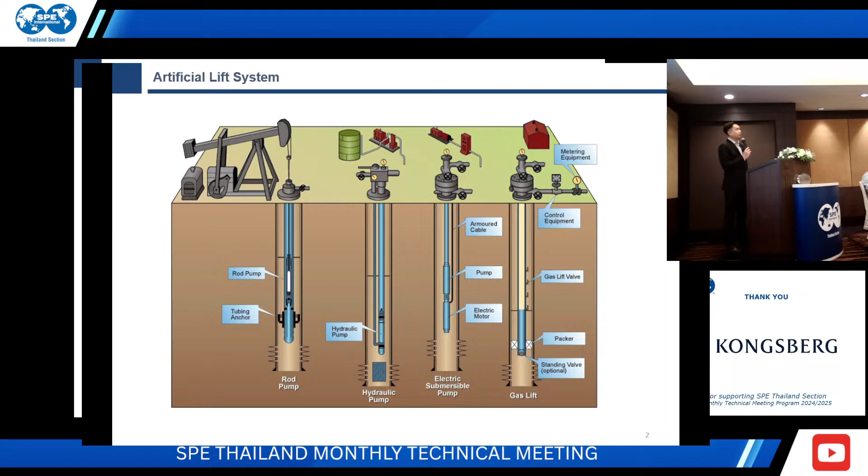Imagine if you are using gas lift, you have to convert into ESP in the future - that can be costly. So at Valeura, we selected ESP as the artificial lift because at the initial phase of field development, we don't have sufficient gas to do a gas lift. We cannot fit other types of artificial lift system. So currently, at our field, across all our operating fields, we operate about 150 plus population of ESP wells.

So let's give an introduction of what is the ESP. ESP can be separated into two parts.

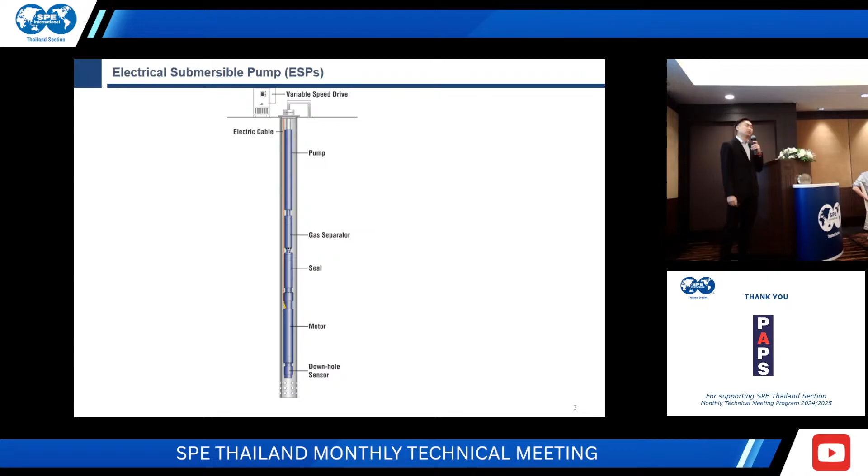Okay, on the top side you can see the VSD, or variable speed drive. At the downhole part, there can be the pump, gas separator, seal, motor, downhole sensor, and ESP cable. Let's go one by one.

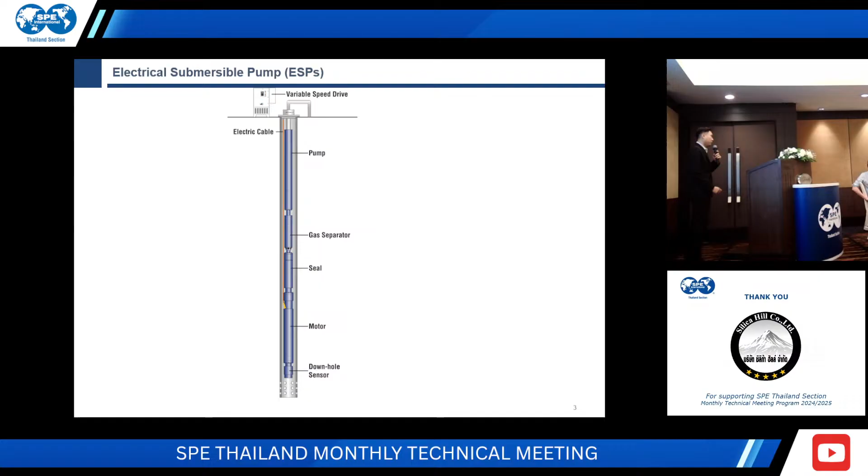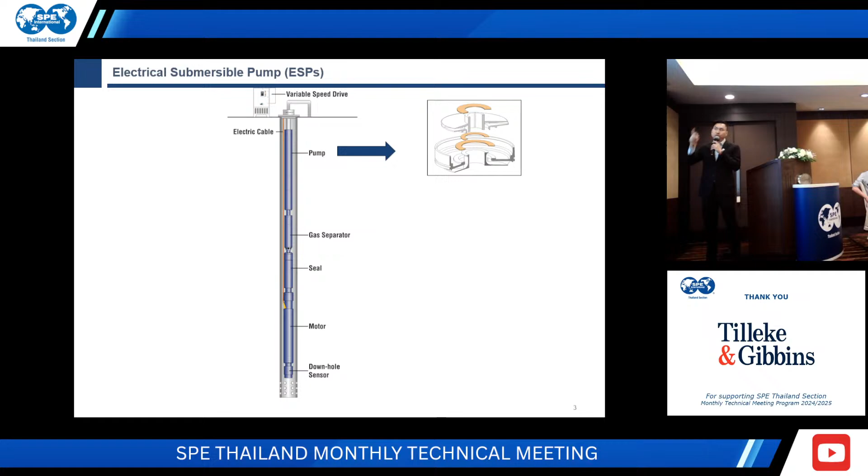First of all, the pump. The most important part of the pump is the pump stage, which comprises two parts: the diffuser, which is the stationary part, and the impeller, which is the moving part, moving fluid from downhole to the surface. You can see the yellow half circle there - they call it the thrust washer. That is to protect against wear inside the pump stage.

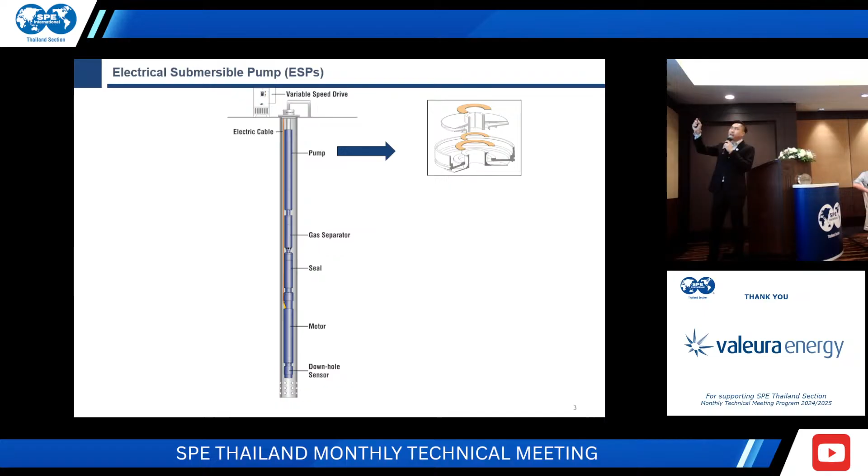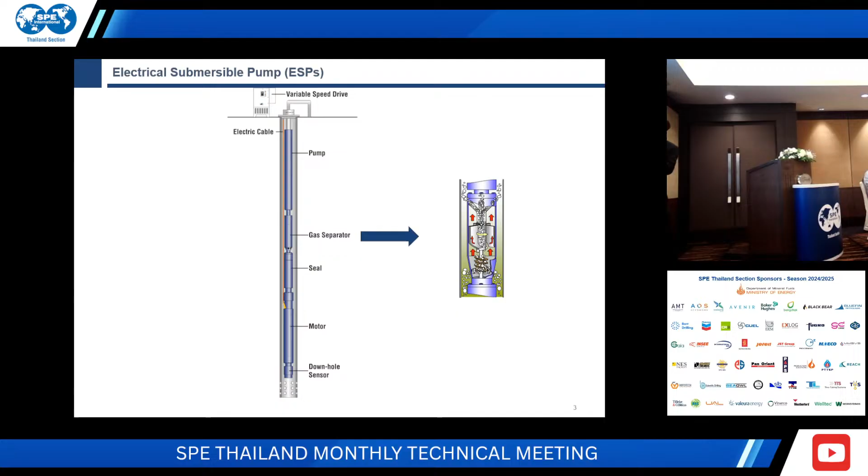Next, if the well has gas, the gas separator can be equipment that helps improve the performance of the pump by separating the gas. You can see the small inducer here - from the big bubble, they induce the small gas, and then this part will use gravity to separate the gas out to the annulus. So if your well has a gas issue, I would recommend using the gas separator.

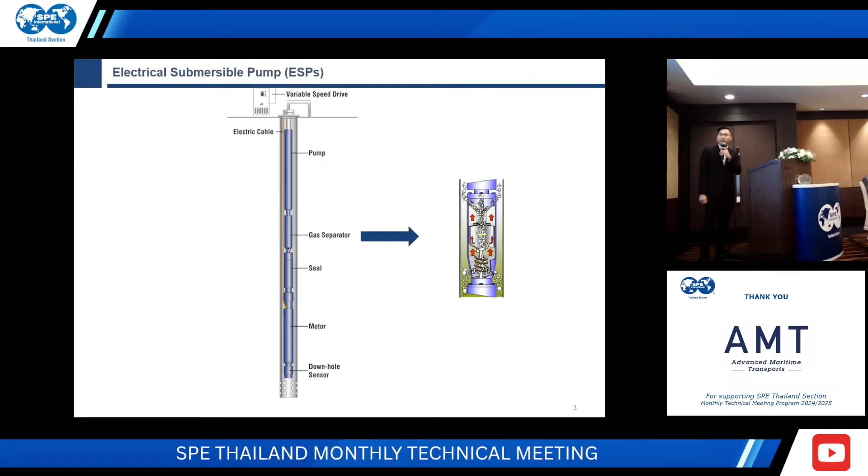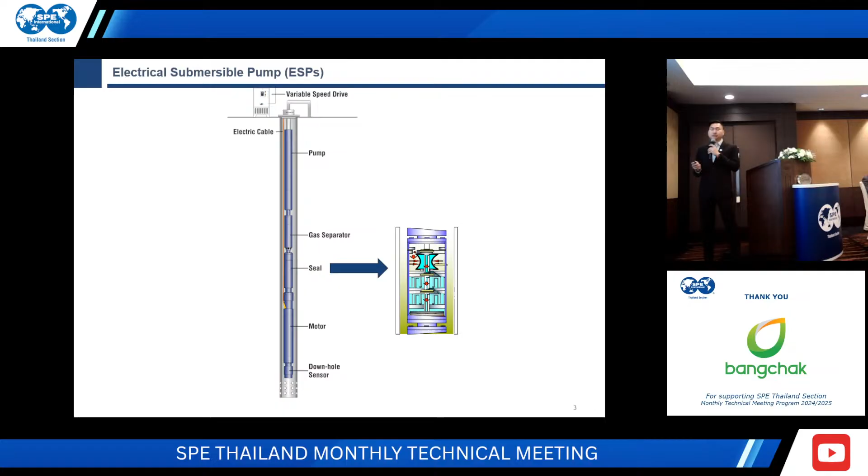So next one is the seal. What is the function of the seal? The seal is used to protect the motor, which is the electrical part. The rest of the equipment I talked about just now is the mechanical part. So the function of the seal is not only to protect the motor, it's also to balance the wellbore fluid and the internal fluid, like motor oil.

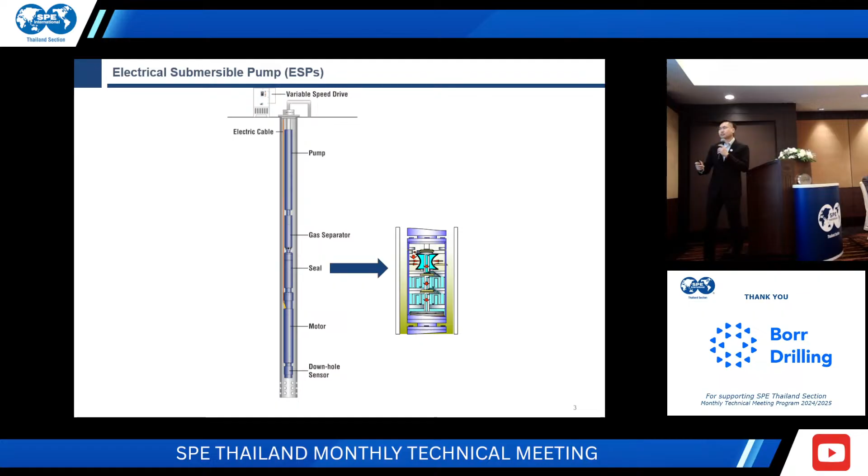Next is the motor. The motor is an electrical part, energized by the power cable from the top. So the motor is driving the shaft from the whole system in order to give power to the ESP.

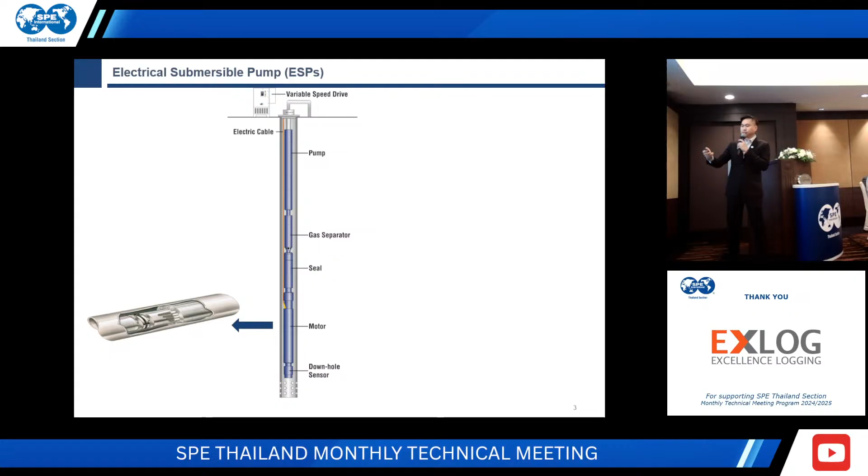And next is the downhole sensor. The function of the downhole sensor is to monitor reservoir parameters such as pressure, temperature, or even give the vibration of the system.

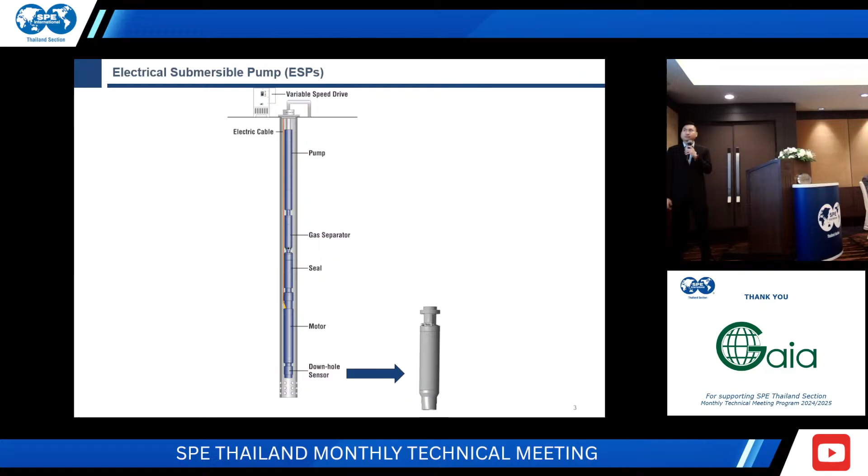So another important part is the cable. Cable can vary into any shape - round, flat - and then depending on the power rating that we need to use, it can be 3K, 4K, and rated based on the temperature of the well. So these are all the main components that we normally use in the ESP, and each of them has an important part to improve or extend the run life of the well.

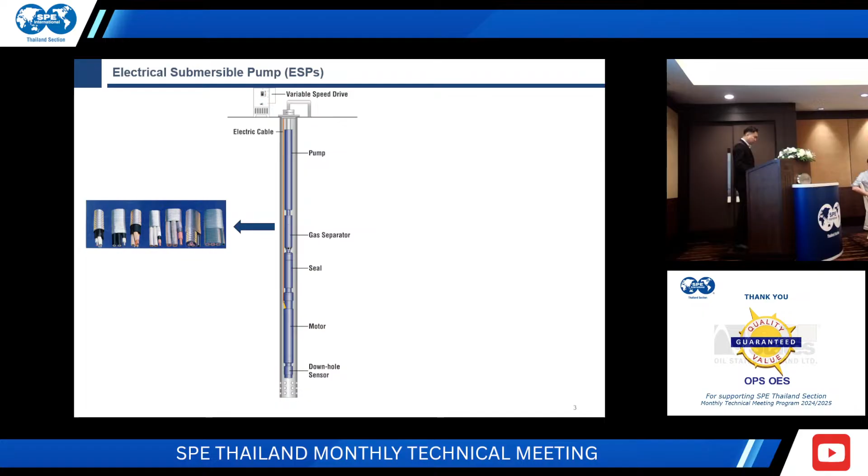Okay, again, why is the ESP important? It's important because in our operating field at Valeura, we use 100% ESP in our production wells. So if one well fails, the cost of the workover can be from maybe $1 to $10 million, depending on the environment - offshore, onshore, the cost can vary. So if the well goes down, of course we need to do a workover.

During the wait for the workover unit to come for the pump change-out, it may be 60 days, 90 days, or even longer. During that idle period, you're going to have deferred production. If you're counting maybe 100 barrels a day of oil, multiplied by the oil price now, maybe $60, and an idle period of maybe 100 days, you can calculate what you are losing during these idle times.

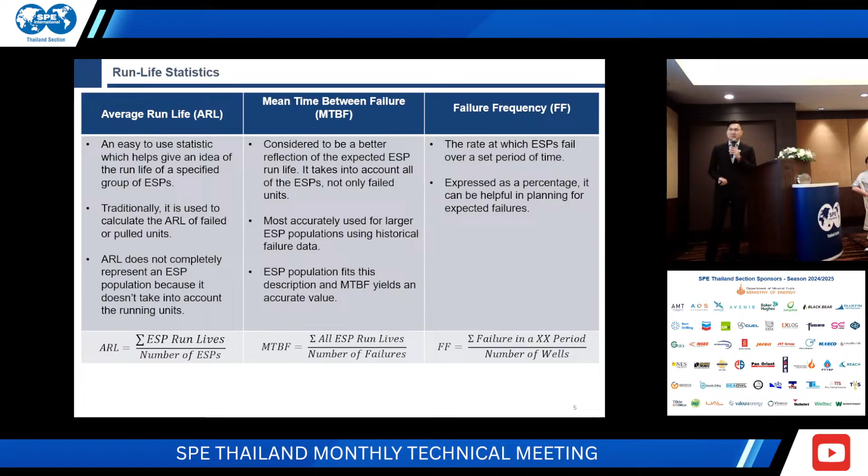Let's talk about some statistics. We can use three main statistics to measure run life. The first one, the most easy form, is the average run life - just the summation of the ESP life divided by the number of ESPs. But this one isn't really complete in representing the performance of the life, because it doesn't take into account the running equipment in the field.

So the other form that we normally use is what we call mean time between failure. This one represents better in terms of statistics because it counts the failing and the running equipment at the same time.

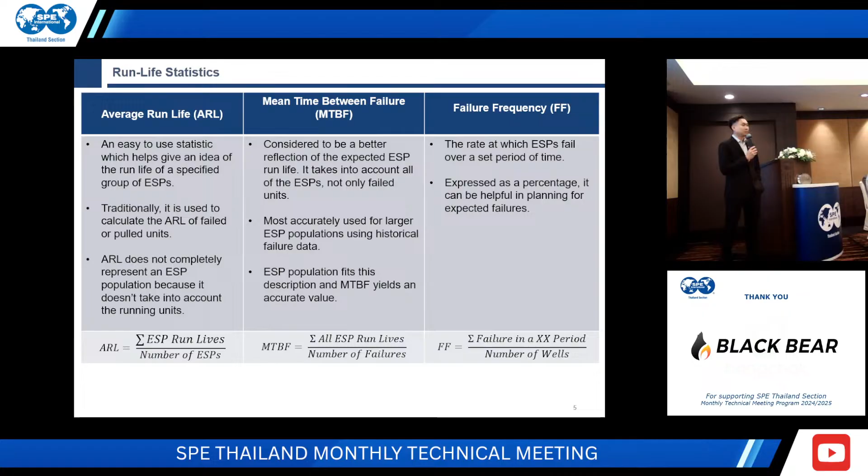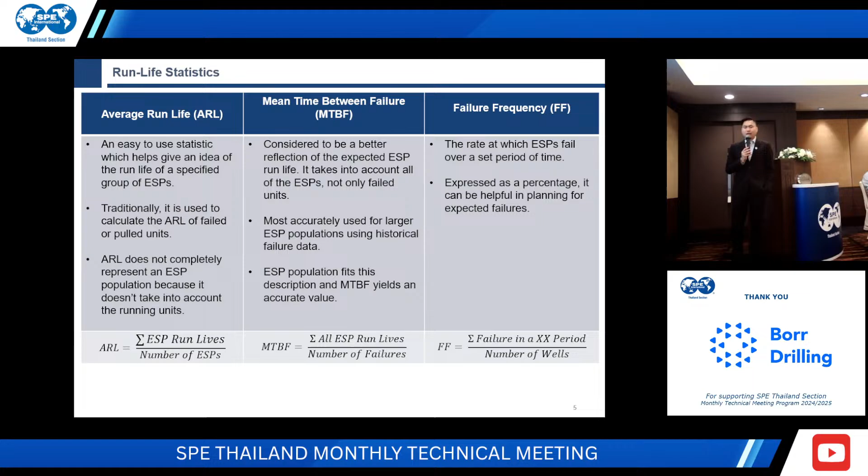And the last one, if you have frequency of failure - this tells you how often your equipment has failed. This is another form that is normally used to measure the life or performance of the ESP.

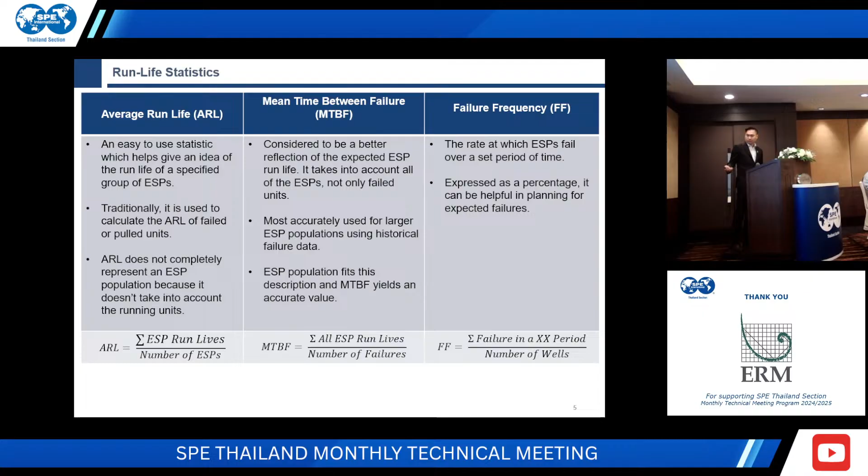So anyone can guess what is the good average life of the ESP? Anyone? 2 years? 4 years?

Actually, there is no right or wrong number if we're talking about the average life. Whatever number you said, if the well economics works for that specific life, it can be a good life. But next question, what is the industrial standard for the ESP life? Normally, based on a lot of SPE papers, they refer to about 1,095 days, or about 3 years. So this is a rule of thumb that we normally use in the ESP industry.

So these are some factors that have an influence on the life. It can be well temperature, viscosity, well conditions, or equipment design. That can affect the life. Imagine if you put the wrong pump, such as a low volume pump, without the gas handling device, in a high gas production well - that can affect the life of the equipment. This is part of it.

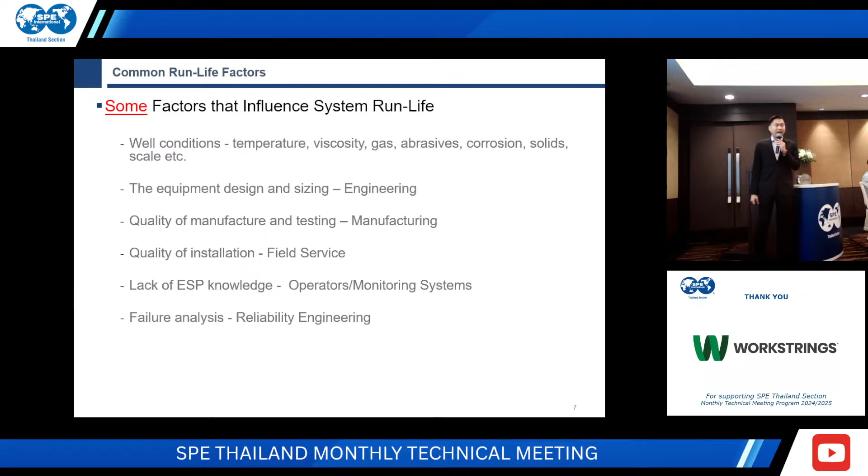And of course, the quality of the field service - that is another factor to me. I used to work as a field service engineer before, so a good quality of field service standards impacts a lot in terms of the ESP run life.

And next, talking about the knowledge - back in our day, when we had a poor run life, we found that our people also lacked knowledge about it. What is the ESP? How does it operate, and how can we make it better in order to achieve a good life.

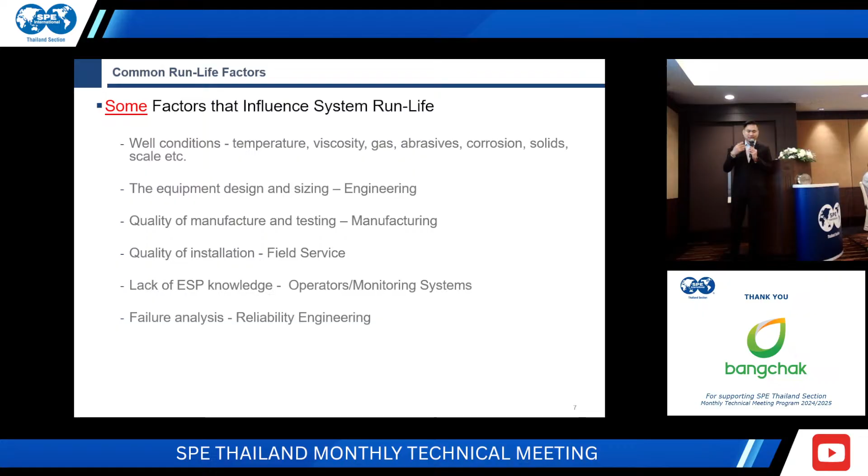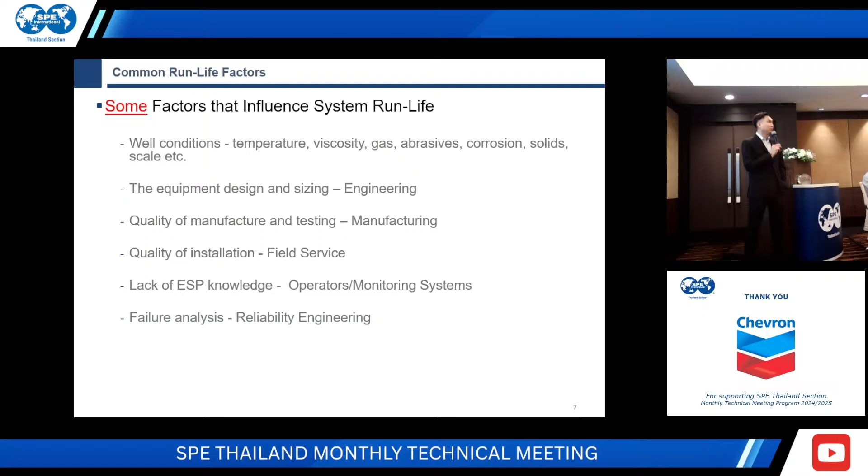And the last one is about the failure analysis. What I should say here is that if you have a failure, and you haven't investigated what is the root cause of the failure, you can have repetitive failure again. So before you select new equipment to work over your well, you should find the root cause first before you do a workover.

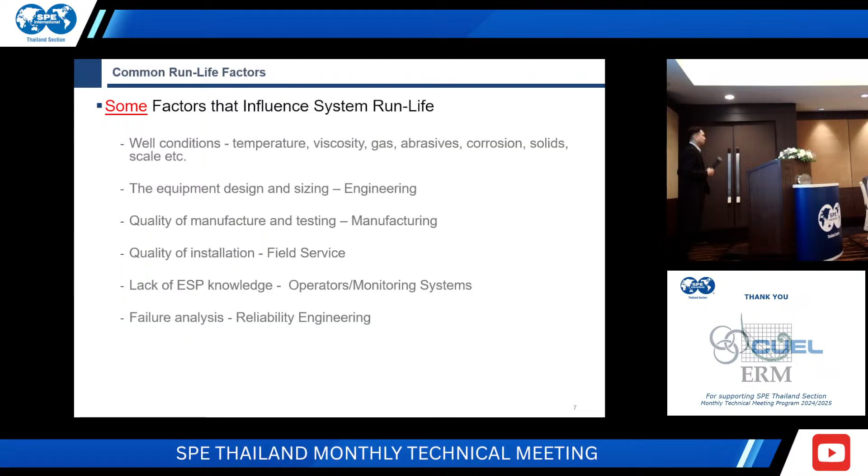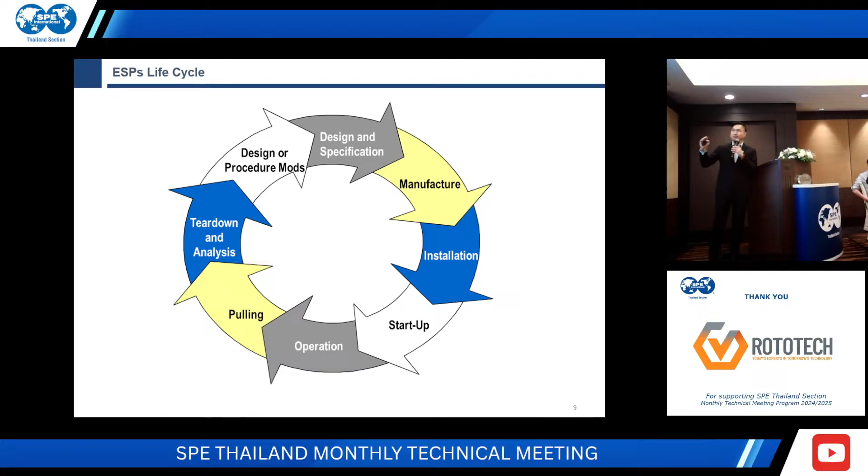So let's start with what we have done. We use this - we call it the life cycle of the ESP. First of all, we start with the design and specification. Back to what I just described, about selecting the wrong pump with the wrong well.

So what we have done here is we start grouping the flow rate. You can see that we have grouped high flow, medium flow, and low flow rate here. And not only the flow rate, we look at the total dynamic head of the pump in order to size the pump stage properly. So we group this, and then standardize the equipment across the field, because in the past we used to have like 5 wells with 5 pump models, or 10 wells with 11 models. So we are grouping into 3 models.

Okay, so next, for the well that we have a gas interference issue, we also integrated the gas handling device into the design to prevent the gas lock.

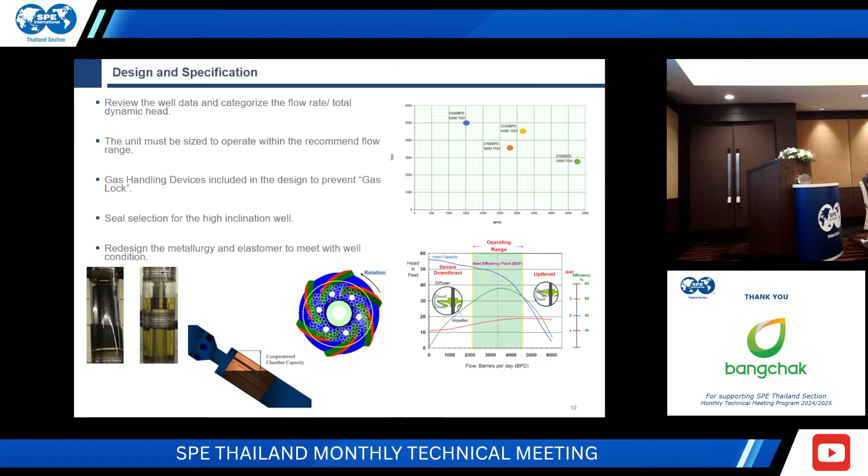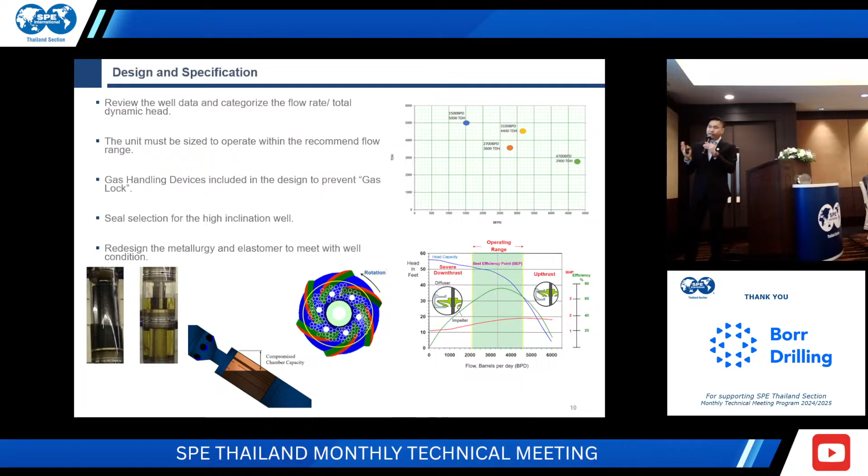To explain the gas lock, look at this picture. Normally, because of fluid gravity, the lighter fluid tends to be accumulated at the center or the eye of the pump stage, and the heavier fluid, which is maybe water or oil, will be accumulated outside. So this equipment has a hole at the middle that helps flow the gas at the center. But of course, this will trade off with the lower head of the pump.

Another thing I forgot, this one. So not only for the correct sizing, we also, at the sizing, look at the operating range. We design the operating points of the pump into this area, which we call the best efficiency point, or the ROR, the recommended operating range. So we don't size the pump into this up thrust or down thrust.

Unfortunately, like today, I cannot talk about the design too much, because that is not the objective of my presentation today.

Next, what we have done. If you look at the picture on the left, that is we call the bag system for the seal. On the right, we call the labyrinth system. So in the high inclination well, imagine maybe 80 degrees, 90 degrees, and if you use the labyrinth, you can see that it can compromise the chamber capacity. So instead of using the labyrinth, we change the design to use the bag system for our high inclination wells.

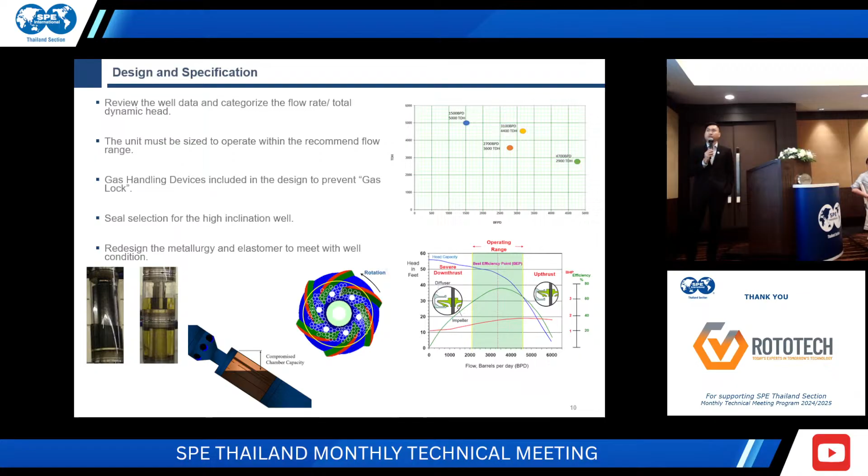And the last one is about designing the metallurgy for the maybe corrosive or sandy system, like we use and call AR, abrasive resistant, integrated into the pump. Look at the well temperature again, and select the elastomer that's proper for the well temperature.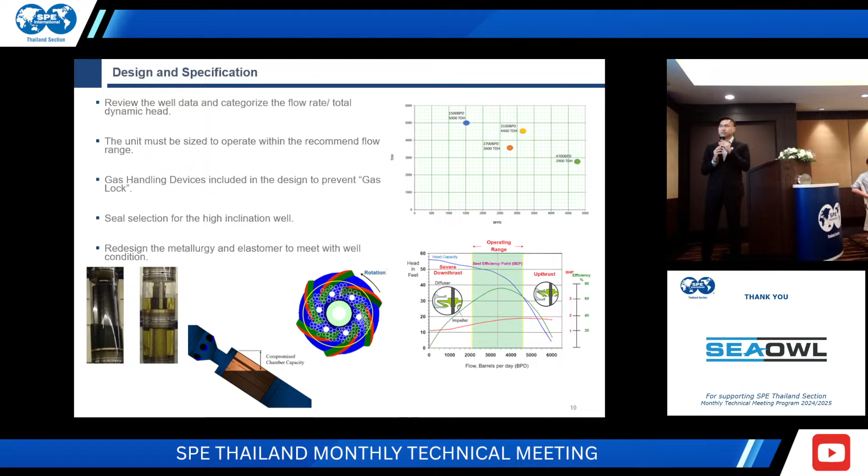That is about the design.

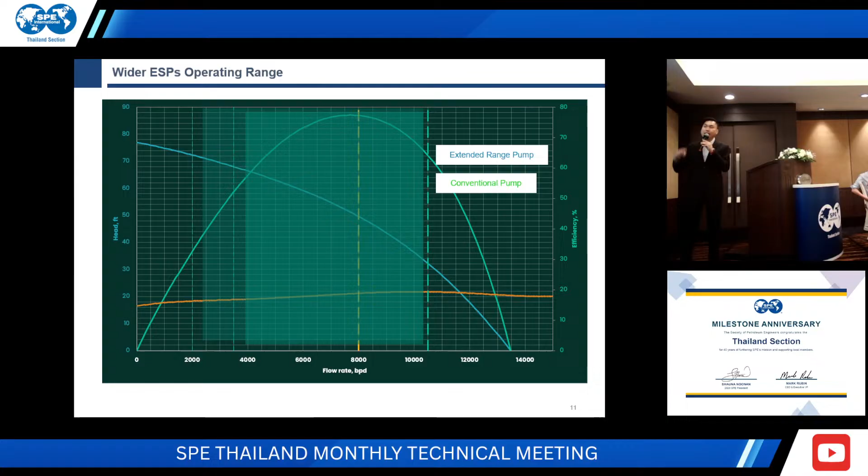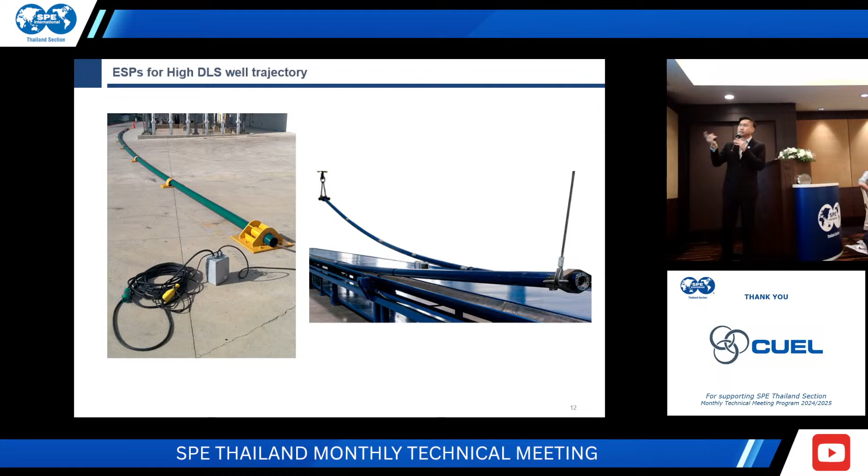We use this one in wells that have DLS more than 6 degrees, up to 15 degrees, in order to unlock some of the wells that have very short life because of equipment breakdown at the connection. So what is the technology? The technology removes what we call the bolt connection between each component - between pump, motor, seal, which used to be the bolt connection. So this one is a thread connection, in order to provide more flexibility of the equipment when passing through those high dog legs.

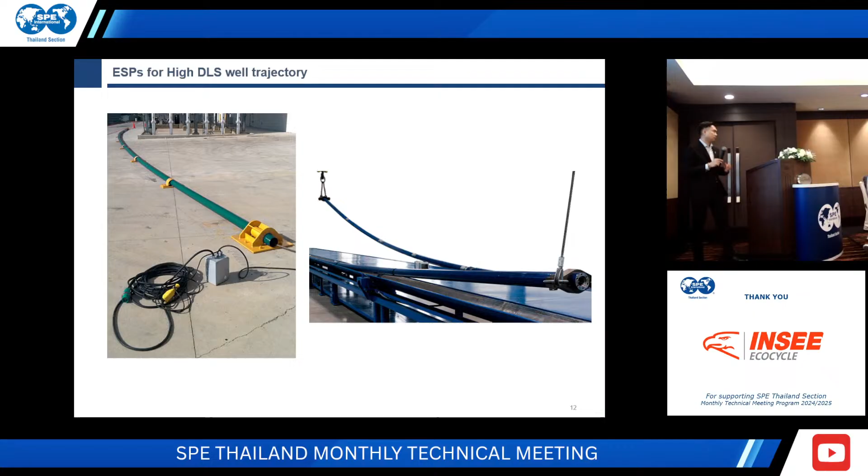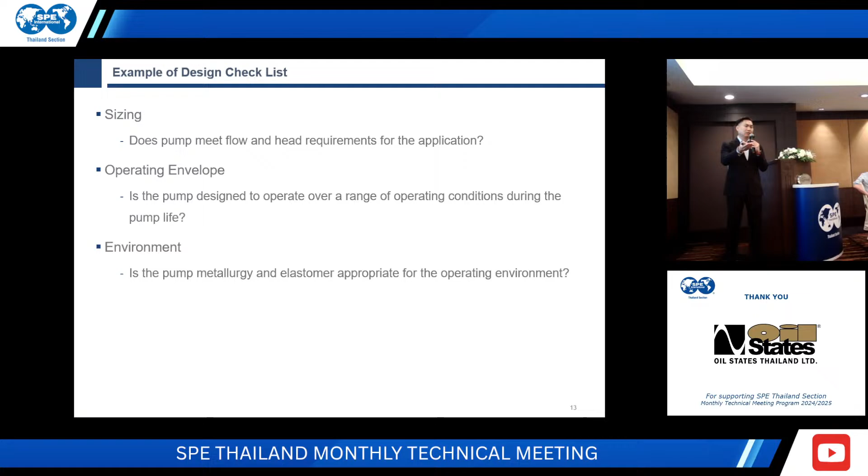Okay, so but before we start to install the equipment, or place an order, we need to check all of this. For example, like sizing - you need to question yourself, does this pump meet the flow and the head requirement of this well? Or on the operating range, is the pump operating in the operating range, or whatever condition they're facing in the future, like maybe the flow may not be as high as your expectation, or the flow may be lower than what your expectation. So that extended range can help in this case.

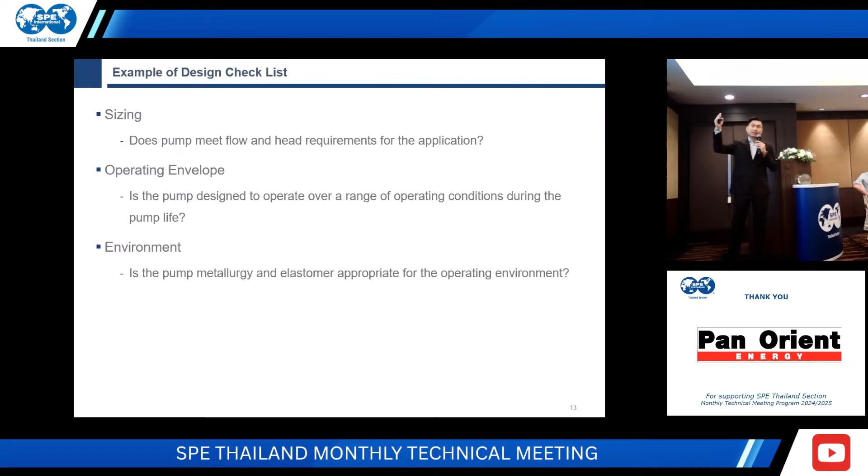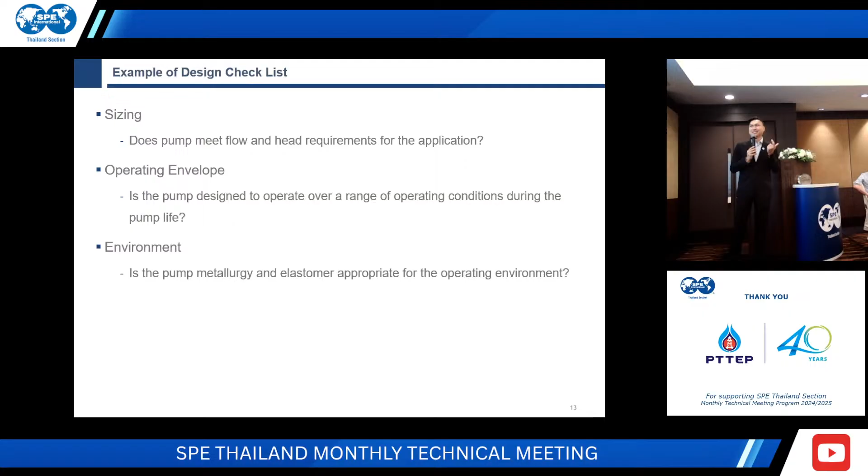And again, for the environment, these are the 3 keywords: sizing, envelope, and the environment. These are the 3 keywords we check when we check the design.

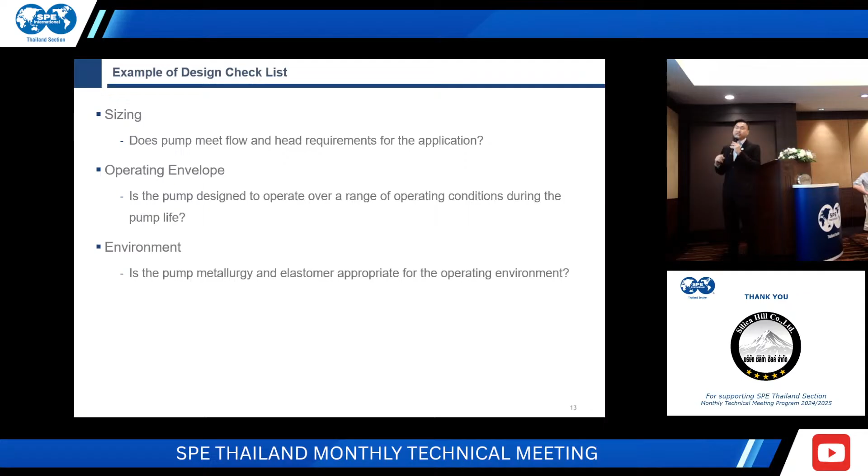But this is just an example - the same thing will be applied to the pump, motor, seals again. Because, for example, like the seal - if you have a high angle well, you shouldn't use the labyrinth seal, you should use the bag system.

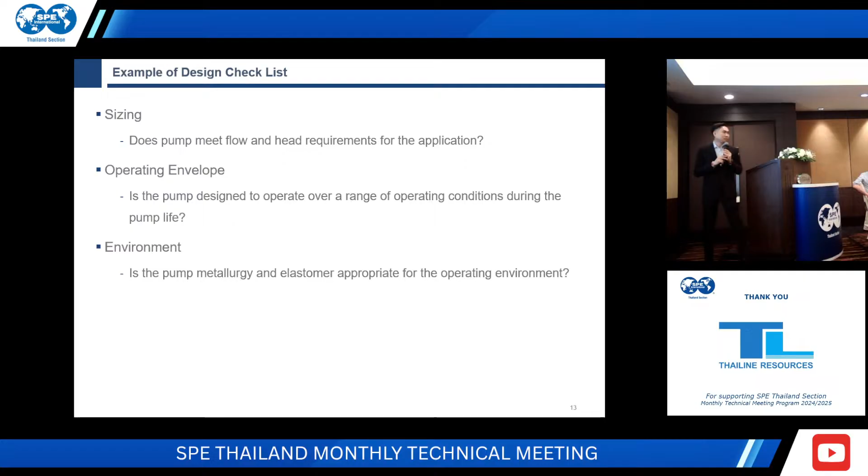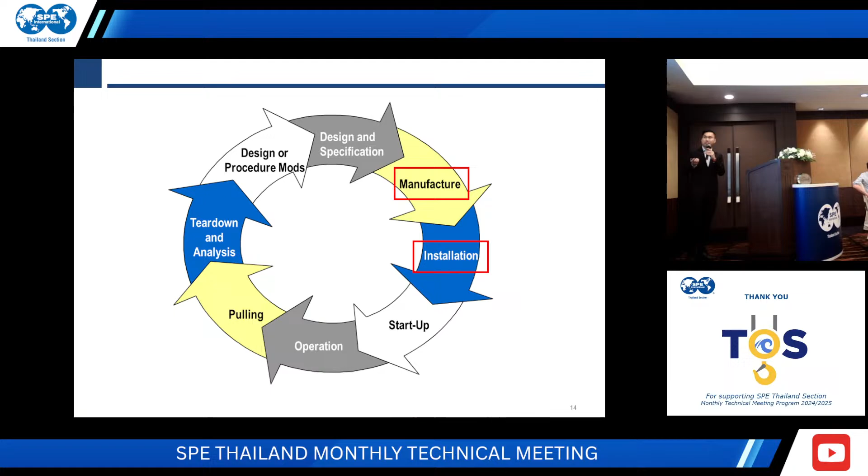So I already finished the design and the specifications. Next is the manufacturing and installation.

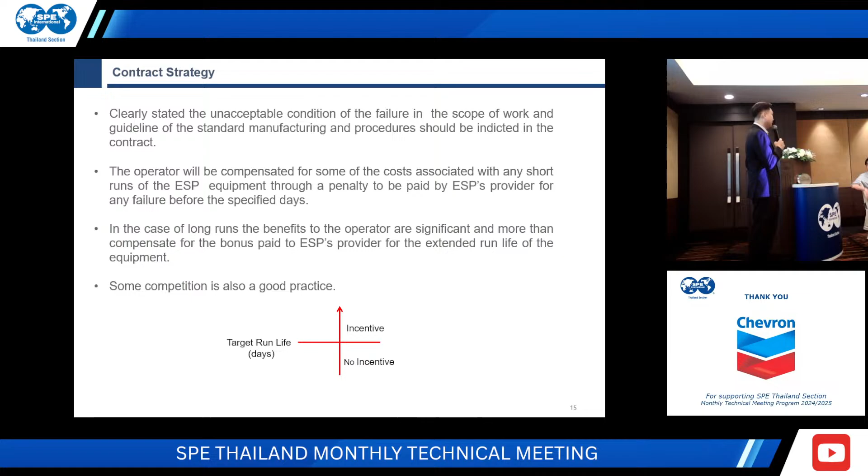In manufacturing, you need to put the scope of work clearly - what kind of API standard, what kind of equipment fits your well. You provide the well data. If you're not sure about the well data, you can give a range for pressure, temperature, in order to size it properly. And of course, the ESP is so important to your fields.

So why don't you set the target as the goal for your business partner? You can see on the bottom we put the target life here, and whenever they pass this target life, you can give them some incentive as an attractive bonus for performing the job properly - equipment, design, preparation, installation, even monitoring. They should be part of this work with you.

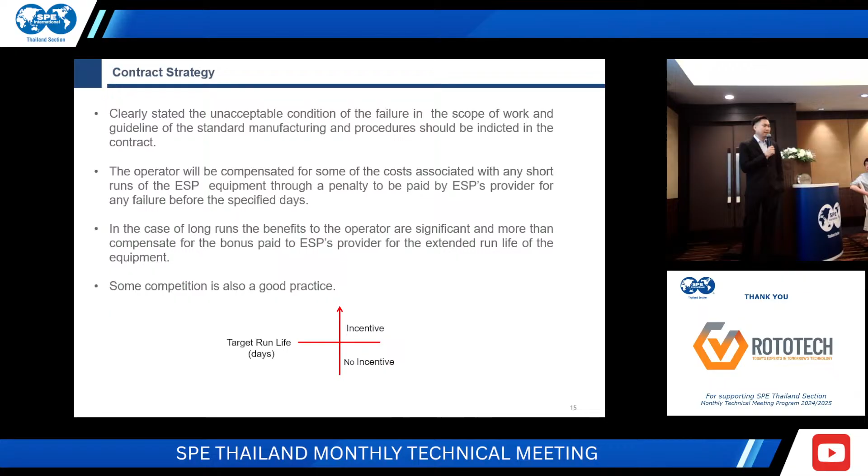And of course, another idea we have is we can open the competition to any business partner willing to help you improve the life. You don't need to have only one contractor - have two, for the competition.

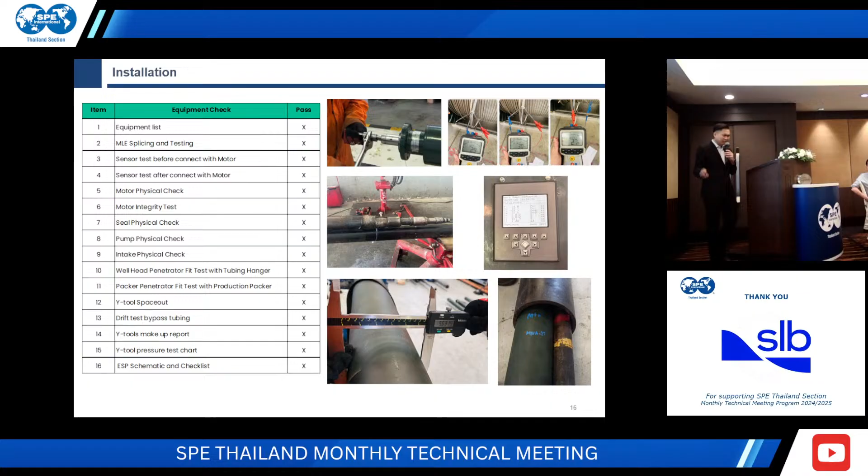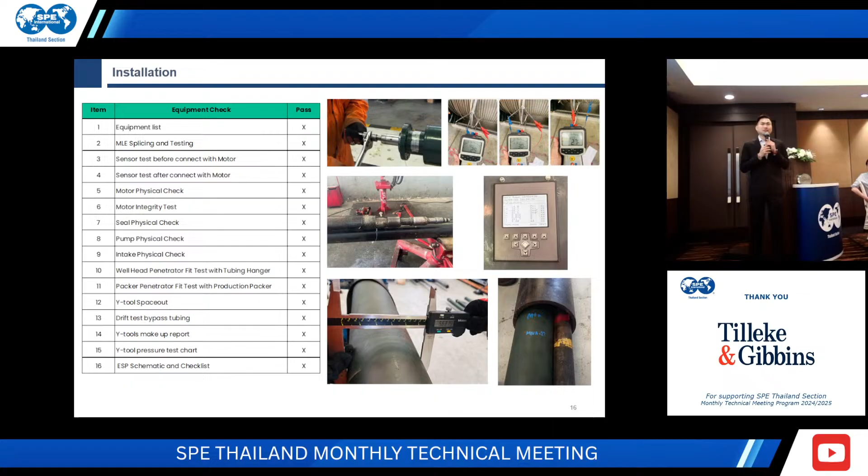For the installation, this is just an example we used in the workshop - we call it pre-delivery equipment inspection. Instead of sending the equipment straight to the field before installation, we do some checking to confirm it's in good condition. No surprises - we put it in the box, send it out, and it's ready for installation. The side benefit of this is it helps reduce the working time at the rig.

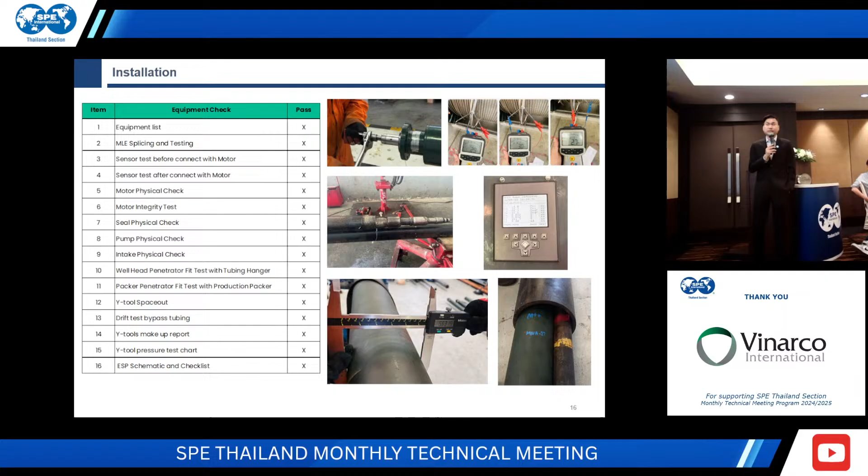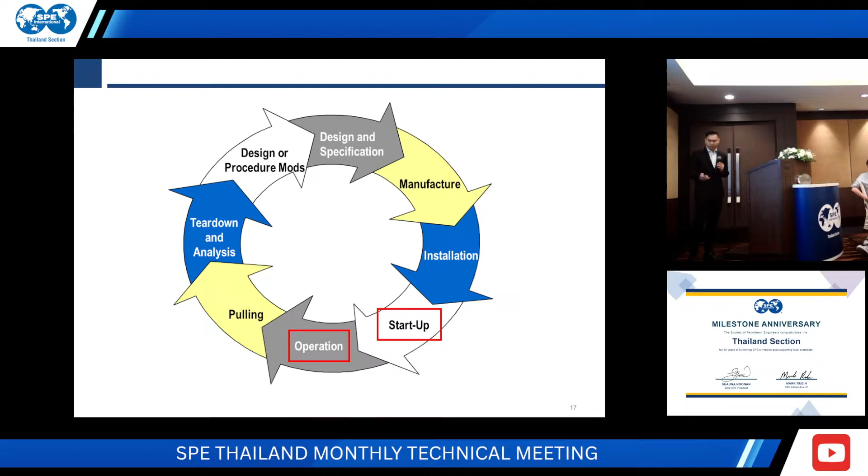So next one, the startup and operations.

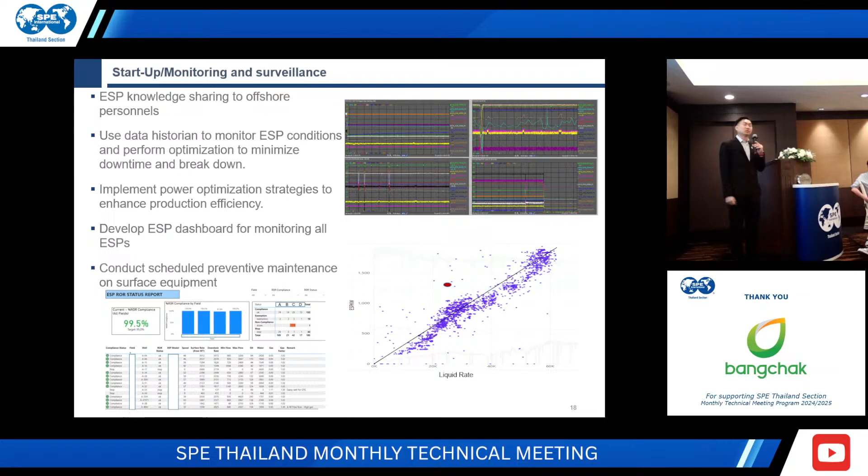I already touched on knowledge sharing, but I'll say it again - offshore, we can train our people to understand more about the ESP components and how important the run life is. We can share this knowledge, for example what parameters they need to look at or monitor offshore - like the electrical part, amps, voltage, or even pressure. That is another parameter they can monitor.

In our field, we integrated what we call SCADA into the monitoring system, customizing parameters such as discharge, pump intake, temperature, and vibration into our monitoring system or data historian to monitor the ESP. Not only that, we also monitor the operating condition - whether it's in upthrust, downthrust, or in the recommended operating range. You can see that the number of our wells can be up to 99.5% within the ROR. That is very important.

Not only on the performance - another thing we should look at is the power consumption, because that's where you spend the money to top up your diesel generator offshore to power up the ESP. So you can see this graph - we are plotting between the liquid rate and the power consumption in kilowatts.

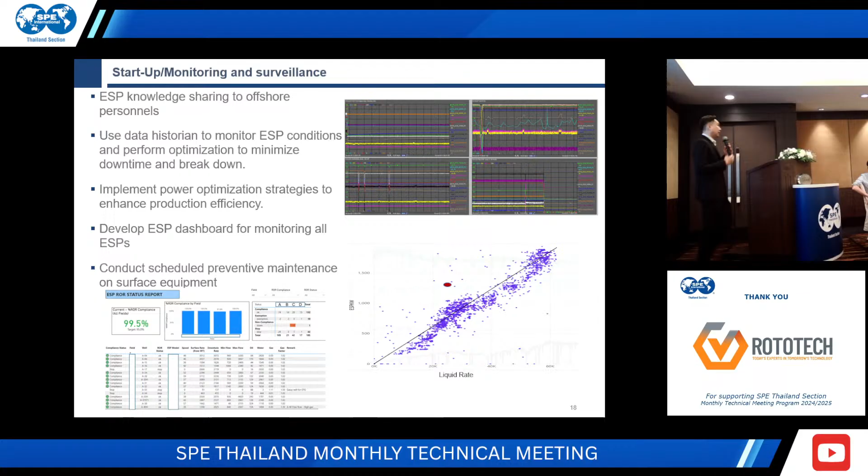You can see that the group, these are in the group or baseline of the power you input to the well and the barrels you get out, on average. But some wells show that you are out of range here - those wells you should focus on regarding power consumption or what it can cost you. It costs you more power to produce the same amount of liquid.

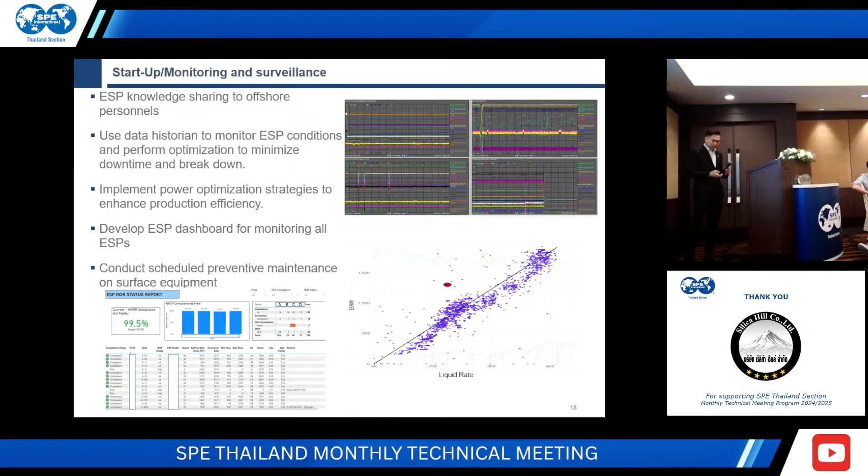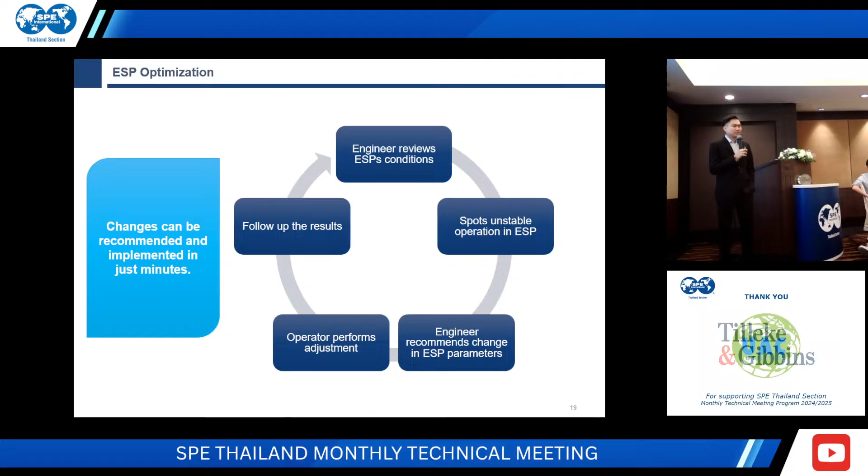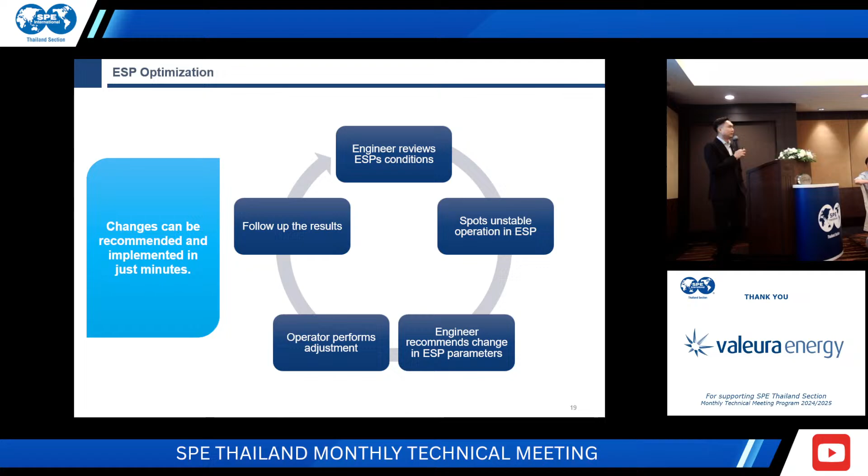Okay, all the ESP optimization that I talked about just now can be performed by people, either on your side, like your operation team, production teams, or even your business partner. But it's time consuming. Imagine, in our field we have 150 wells, and we need to monitor all these wells every day. It takes time and labor to do it.

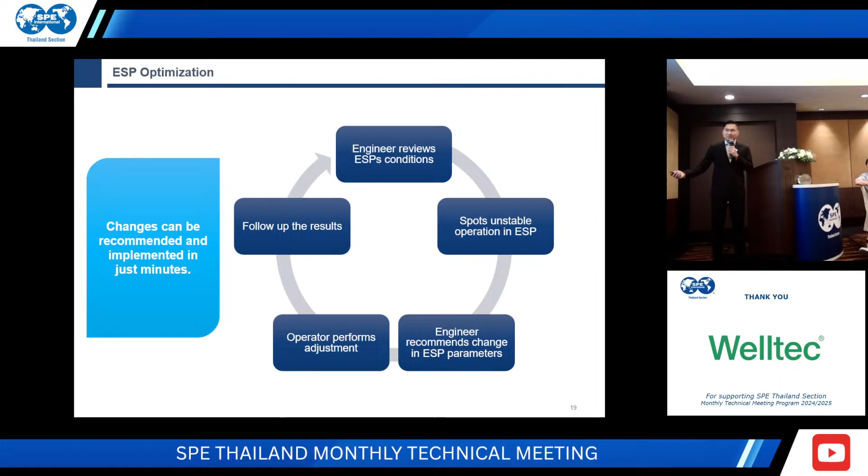So it's an AI world now, right? You know, the ChatGPTs, Copilot, that is AI. So one of our colleagues here is using AI based monitoring of the system instead of using manpower.

He trained the AI by inputting all the well data, production data, and the ESP data into the AI, and the AI started learning the process. He also put the real-time data into the AI. All this data we need to process into the AI language, so that takes time for the AI to understand all this data before it is implemented.

Not only all this data, he also included the nodal analysis of the pump to see the performance of the pump in the model. So if the AI detects something like gas lock, it can notify the operators or production teams to adjust the parameters to prevent early life failure of the equipment. Or some solids, like sand, can be detected by this AI.

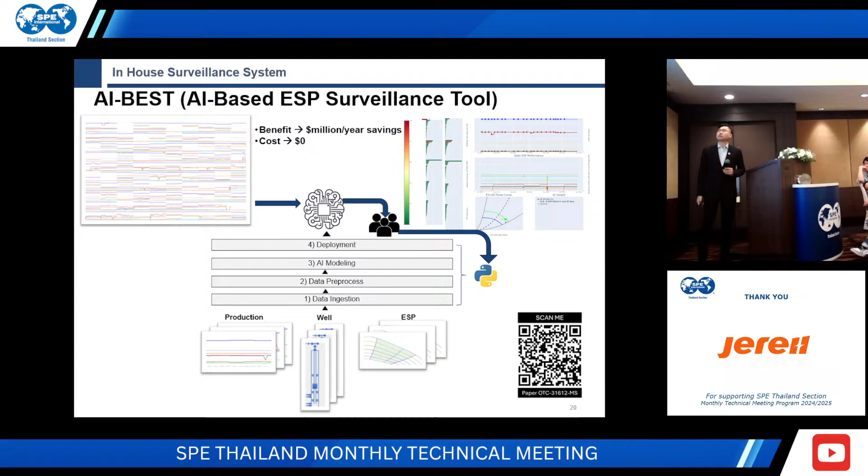Okay, I will group this into one or two slides. So next is about pulling, tear downs, and analysis, and design or procedure modification.

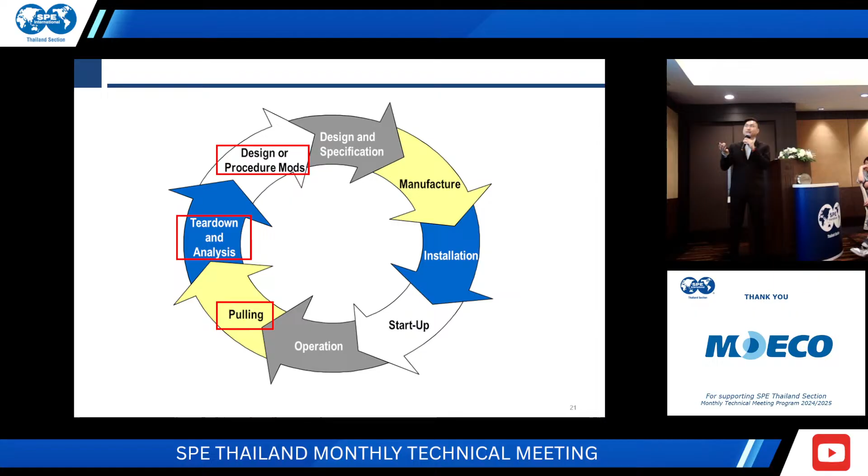So again, AI helped me to do it. We used to have multiple failures with the same occasion, and at that point of time we never analyzed or found the root cause. So we kept having failure after failure.

So if you want to prevent future failure, you need to conduct a comprehensive analysis before you go to the next one.

So the field that I'm talking about just now, these are examples of the failures that we have: electrical grounded, mechanical stuck at the pump, seal failure. I already gave you an example, or even installation error.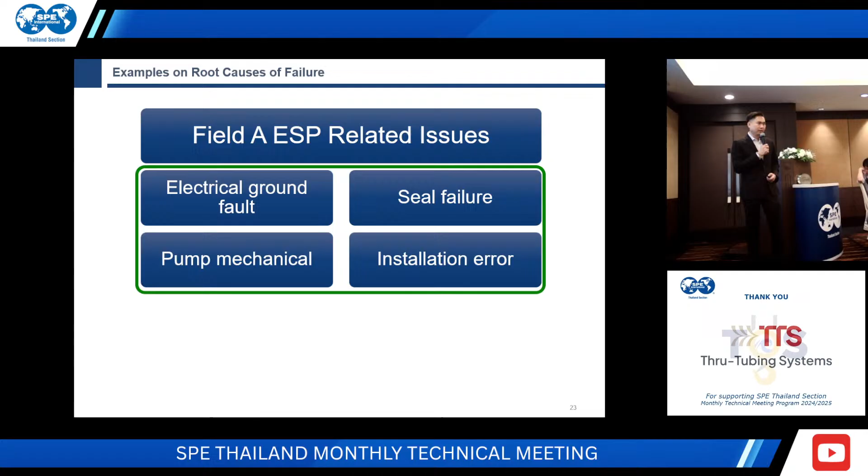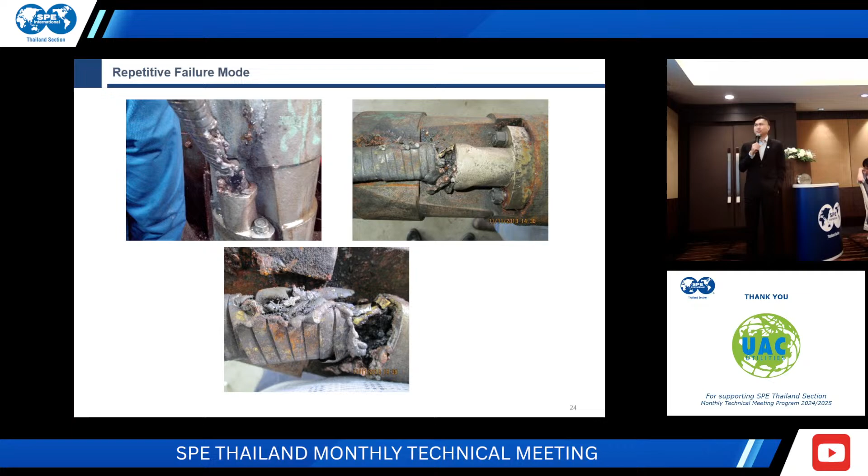So this is the picture, back to 2013, 2014. You can see from different wells, or even some of them in the same well, there's a repetitive failure at the pothead of the motor. And at that point of time, there was no finding of what is the cause of this failure. So we kept installing the equipment.

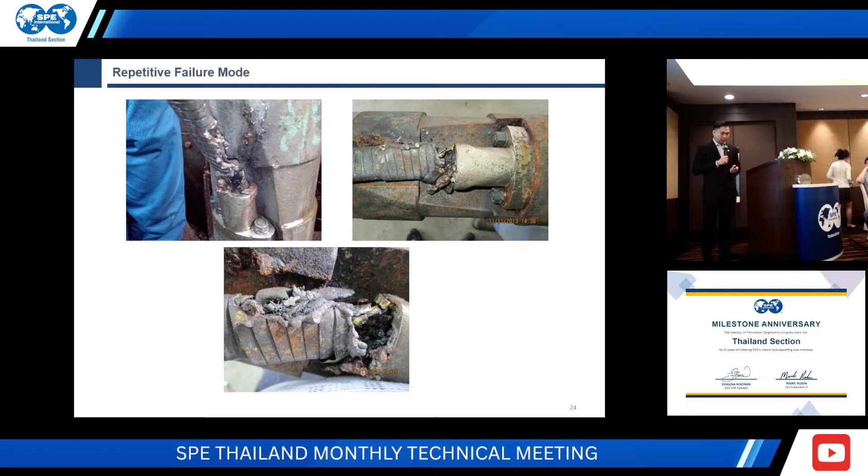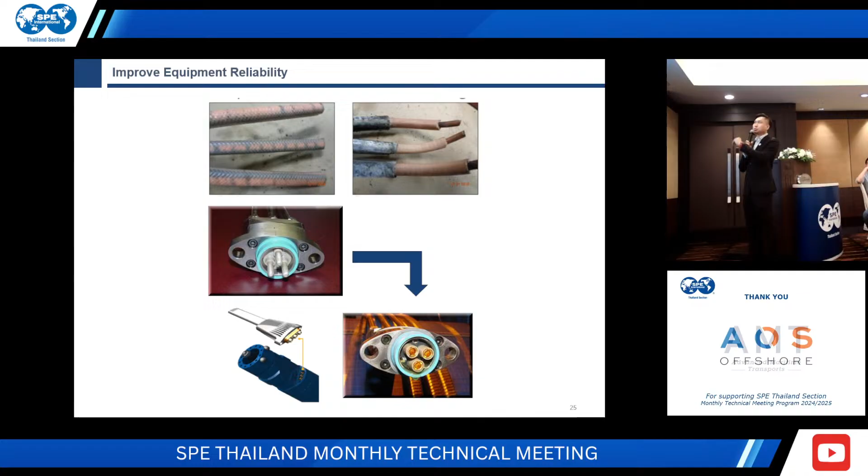So from that previous picture, these are the improvements. We are changing to the new part, we call it the MLE, motor lead extension. We are adding the lead cable sheath into the MLE and changing from what we call the tape-in type, which is old technology, to the new one, which we call the plug-in type.

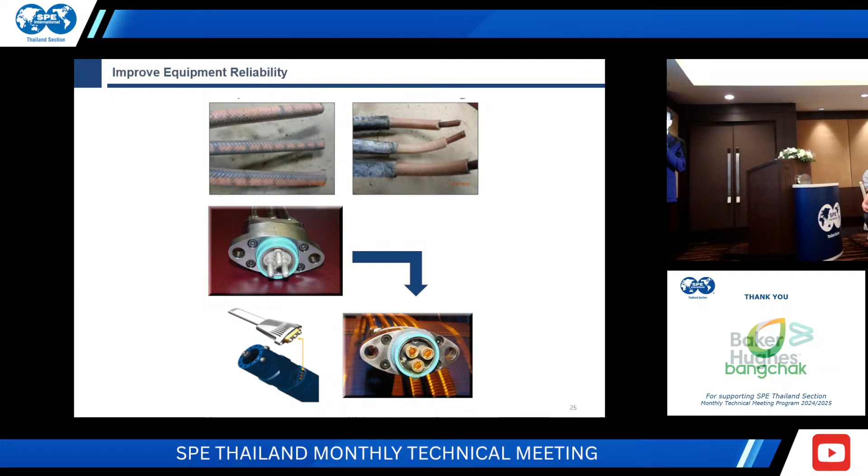You can see which one is more preferable, more preferred in terms of using. It's just like plugging in your television at home.

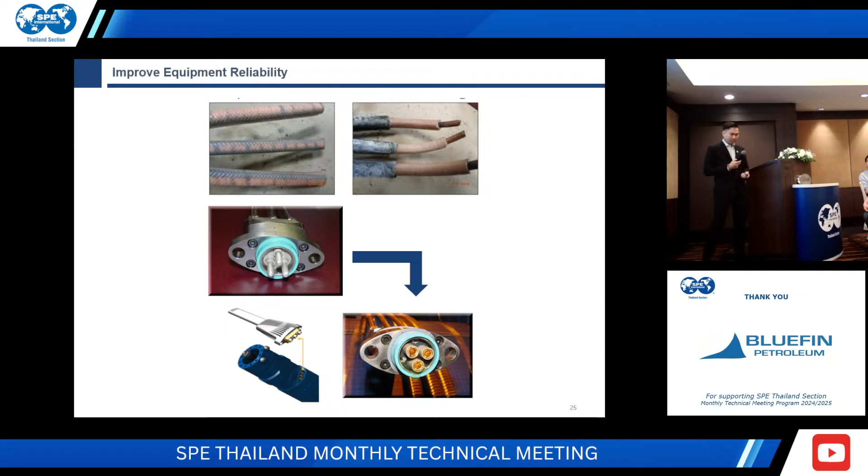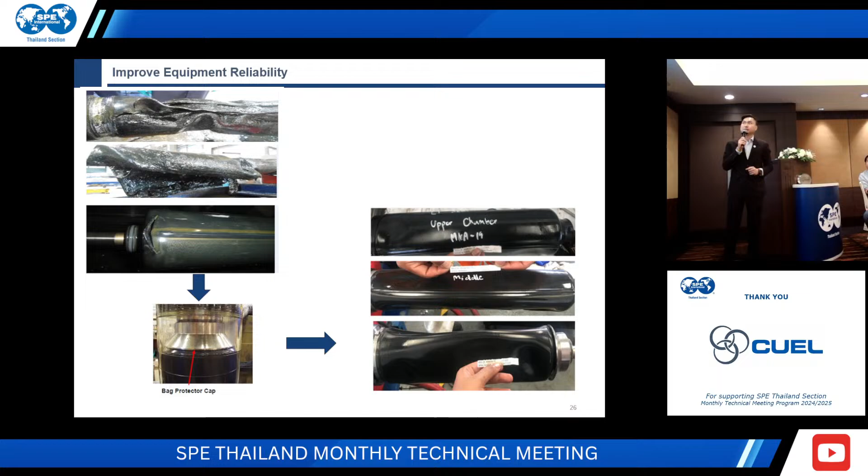And this is another example of improving the equipment reliability. You can see on the top side there, that is a bag rupture or a bag failure when we pull out the equipment and tear it down.

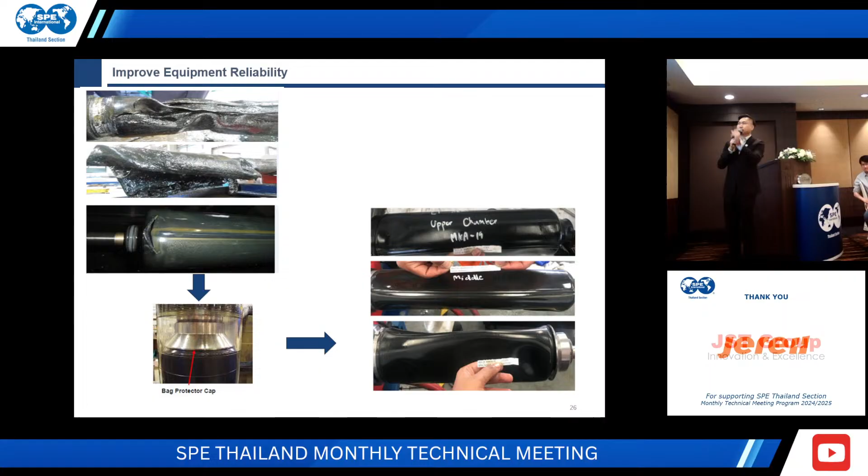So what we found here, first thing is about the temperature of that well, it's higher than what we expect. Another thing is about the pressure acting on the bag. So what we implemented here is applying what's called a bag protector cap on the top of the seal, and we also changed the elastomer material of this seal.

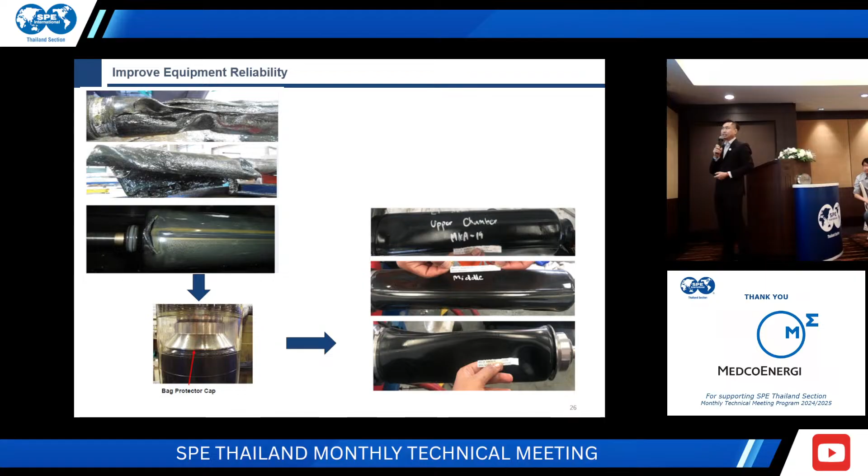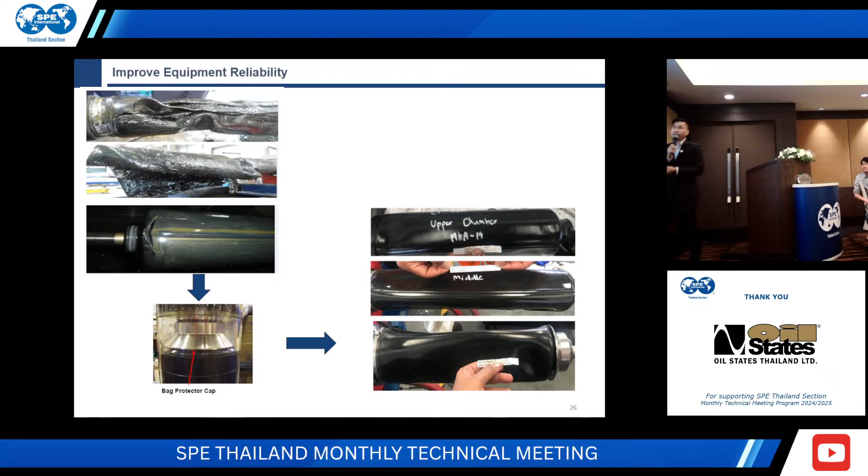So on the next workover, we pull the equipment and tear down the seal to see the improvement. You can see that the seal looks brand new from the pulling, and the cap is still there. The bag hasn't ruptured like the previous installation.

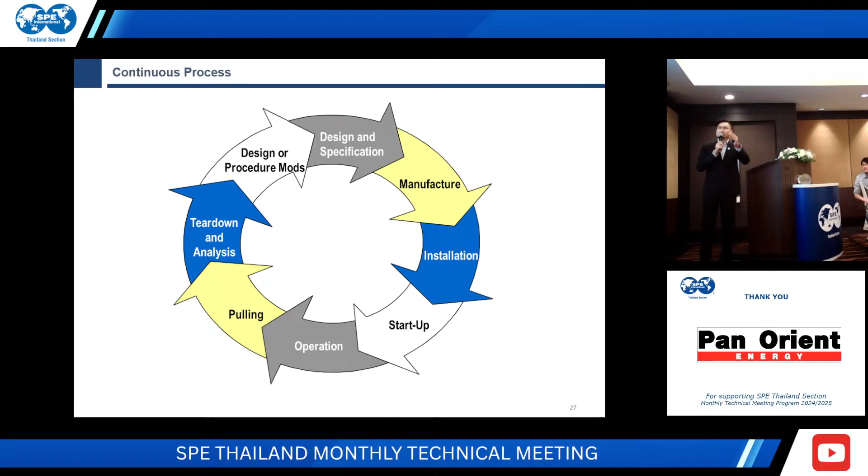So I already completed this cycle. In order to keep improving your life, you need to have this continuous process in the organization.